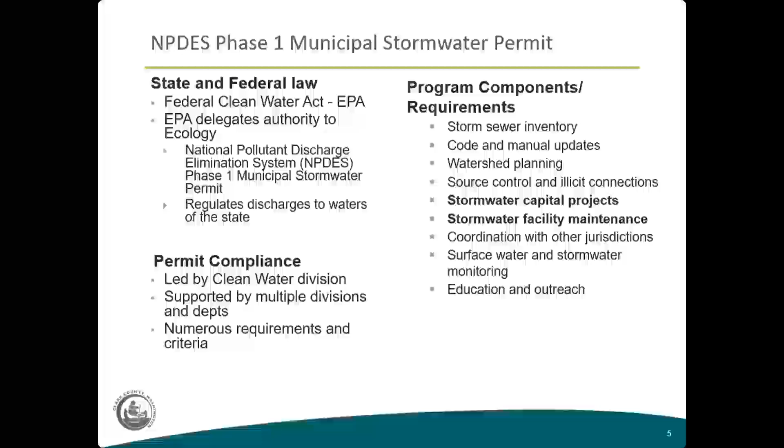So our overall policy at the county is to meet those Phase 1 permit requirements, but along the way, our goals are to protect and enhance our streams and wetlands, minimize stormwater impacts to receiving waters, streams, lakes, wetlands, and also to maximize public benefits from our county-owned lands.

So within the regulatory requirements of the stormwater permit, specifically for capital programming, we have to have a program to manage stormwater for existing developments. So we're trying to prevent or reduce impacts to waters of the state by building projects to take care of stormwater. We're also required to do some stormwater management planning, to do a lot of maintenance and operations of our stormwater assets, and also work on underground injection controls, which are dry wells that put water back into the ground after it's been cleaned.

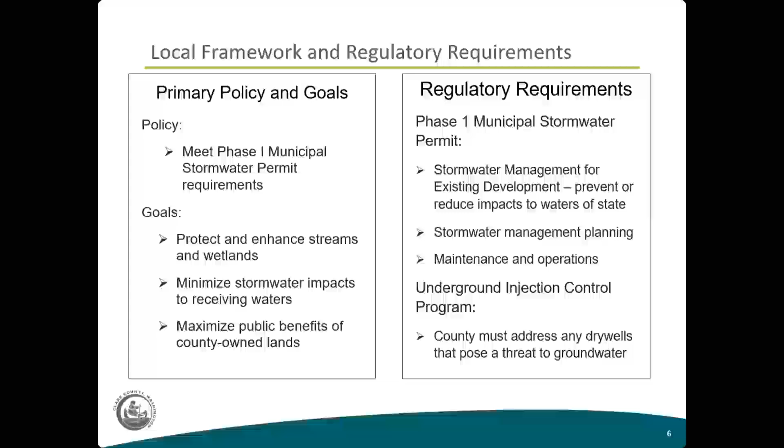So a real quick summary of what we've done in 2024. We had 7 projects this year that were in our construction phase. The largest was a water quality project on 78th Street over by the county's Heritage Farm property between Northeast 13th and 16th Avenues. The picture on the right is a crew member installing a treatment vault at that location.

And then we also had a reforestation project that's currently underway. As we speak almost, they're in the middle of planting an area of Salmon Creek Greenway near where Cougar Creek enters Salmon Creek. And then we had 5 stormwater facility repair projects, which are an important component of our program, taking care of the infrastructure that we already have. We had 9 projects in design this year.

We're always looking ahead, and you have to get ahead of these projects because it takes several years to take a project from the start to finish. So we're always designing the next projects down the line. And kind of similarly, we're also looking for where the next projects are going to be.

So we're looking at our reforestation planning work. Where's our next planting project going to be? And we also continued doing some sub-basin planning where we look for retrofits to the stormwater system in specific areas. This year we did Lalonde Creek, which is a small tributary to Salmon Creek. Our budget this year was about $1.6 million, which is a typical annual budget.

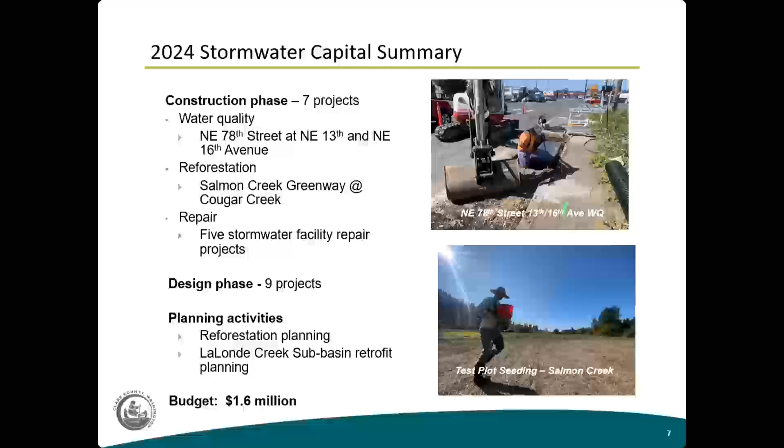Okay, so looking ahead a little bit to the 2025 to 30 project matrix and our priorities for this time period. As I mentioned, repair projects are typically our highest priority. When our existing infrastructure needs some work to get it back into shape, we want to do those things first and foremost to make sure that our systems are working well. It makes more sense to do that than to go out and build a bunch of new stuff if we're not taking care of what we already have. So we do a lot of that.

And then we also do a lot of water quality treatment in areas that have little to no stormwater treatment currently. And one of those areas in the county is the lower Salmon Creek area. So we've been focusing for the last 5 or 6 years now on the lower Salmon Creek tributaries. That would be things like Cougar Creek and Suds Creek and Lalonde, like I just mentioned.

Another priority is reforestation of our county lands. We had a goal to reforest or revegetate with native species 30 acres of county property in 6 years. We just met that goal very recently. And so we're going into our next 6-year period, and we hope to do another 30 acres or so going forward.

And then lastly, we always prioritize property acquisition for stormwater benefit. And to do that, we typically partner with the Legacy Lands and Conservation Futures programs at the county to purchase properties, or at least contribute to purchasing properties off of their acquisition list.

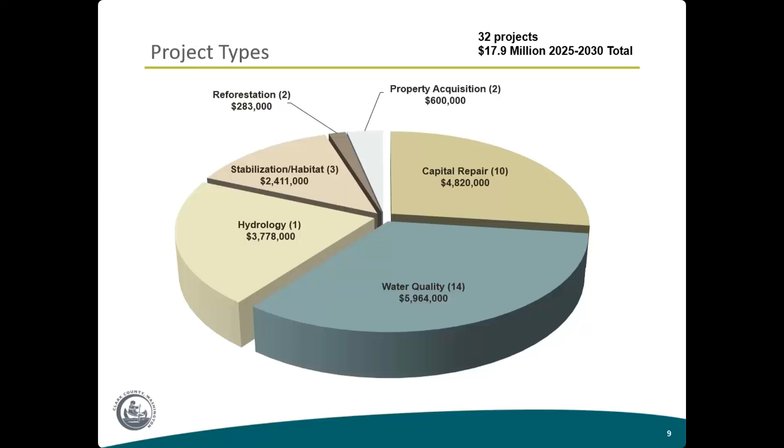So how do we fund these projects? For 25 to 30, to fund that $18 million capital budget, we'll get about $5.5 million from our Clean Water Fund, which is the fund that we use for most of the Clean Water Division work. We have some real estate excise tax 2, or REET 2, monies that we're going to be utilizing this 6-year period, $7.5 million. We always like to try to get grants when we can, so we're assuming about $1.5 million of grant revenue. And then we also have one nice big loan for $3.4 million for one of our projects, again, that Heritage Farm project. The nice thing about the loan is it's a 20-year repayment at only 0.4% interest.

So quick look ahead for 2025. We'll have 5 projects in construction. Our big project is the Heritage Farm wetland restoration that I mentioned.

And then we have 3 kind of major water quality projects along Highway 99 and 99th Street corridors. These are places where we do long linear projects to try to treat high traffic roadways that have very, very little treatment, and the water just goes directly into, in this case, places like Cougar Creek and Suds Creek, which are lower Salmon Creek tributaries. And I'll talk a little bit more about that when we look at some examples.

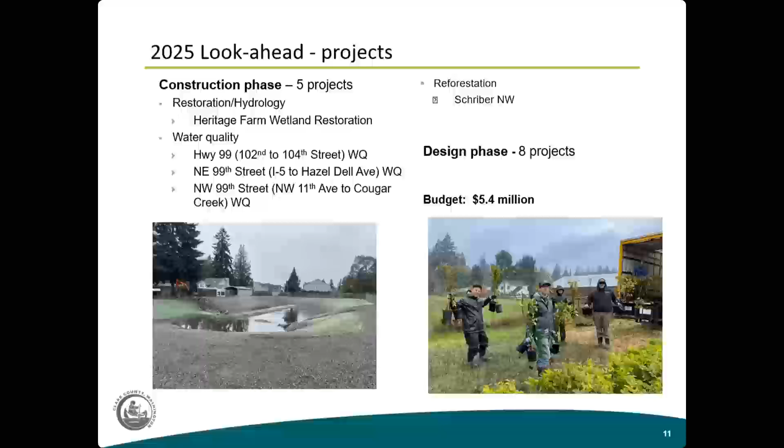So quick look ahead on the planning aspects for 2025. This next year, we'll be looking at evaluating impacts from our brand new municipal stormwater permit. They are reissued every 5 years, and our new permit came out in August of 2024. So we've got some new requirements, as I mentioned.

We'll have to score points based on a metric that the state gives us to make sure that we do enough stormwater management and stormwater capital work. So we're going to be working on determining how many points we're going to get from the plan that we have and see if we need to change anything going forward.

We'll continue doing some sub-basin planning similar to Lalonde Creek. We're really trying to take a look at some of the places now that drain into lakes such as Lacamas Lake or Vancouver Lake to try to get a handle on where we can do the most good with our capital program. We'll continue looking for more reforestation planting opportunities, and then we're going to move into some more intensive asset management and long-term capital planning, hopefully in 2025 or 2026.

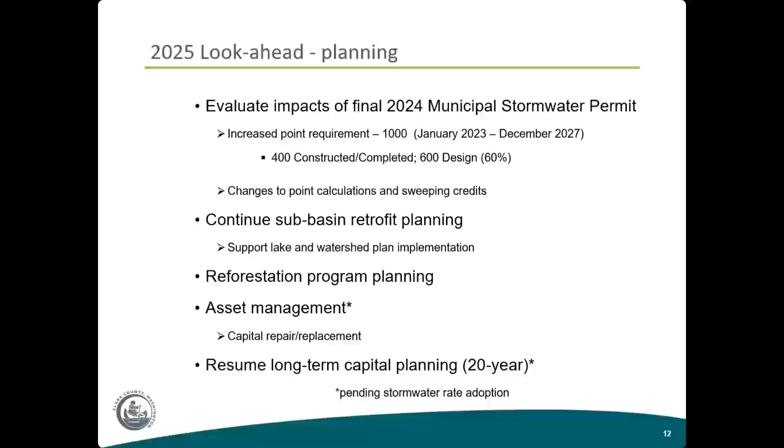Okay, so that's kind of an overview of the program and where we're at with the 2025 to 30 plan. So we wanted to share just a couple of quick examples of the types of projects that we do. And there's really 3 categories that I'll share with you really quickly. And the first example will be the Heritage Farm wetland restoration. And this is a big wetland restoration project. So one category of projects is sort of a restoration and enhancement type of project. And then I'll go over a couple of other types as well.

So the Heritage Farm, this project was part of the Heritage Farm Master Plan in 2020, which calls for enhancing the Cougar Creek watershed and wetland areas. This is at the headwaters of Cougar Creek. And we're going to kind of take what you see there. It's essentially where that light colored line going laterally across the picture is a ditch where old historical wetlands were drained to make room for farming and putting the buildings. We're going to take that and turn it back into a wetland to the extent that we can.

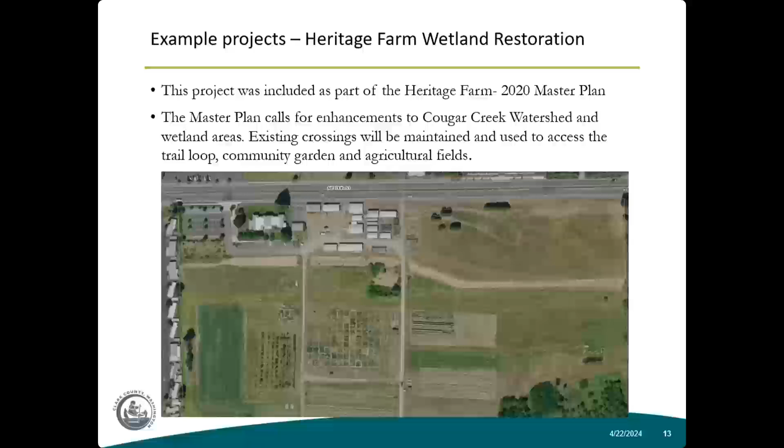So the overview of that project, we're going to convert that ditch back to a series of 8 wetland cells, and that will restore the natural headwater wetland functions of that area. It's about a 6-acre project, and we'll plant about 3,000 native trees and shrubs there when we're done. So the benefits to that type of a project, we're going to increase the groundwater recharge in that area, which will enhance summer stream flow downstream in Cougar Creek and also in Salmon Creek, which is a salmon-bearing stream. So it's good to have that summer stream flow to keep the fish cool.

We should also see some improved water clarity because we'll be reducing sediment going into the stream, as well as those summer water temperatures in both Cougar Creek and Salmon Creek downstream. So all of the improvements that we're making up top at the headwaters should translate to some improvements all the way down the system and into Salmon Creek.

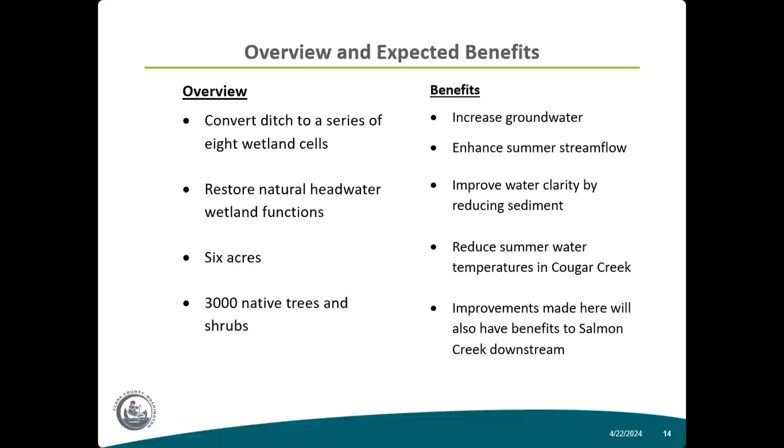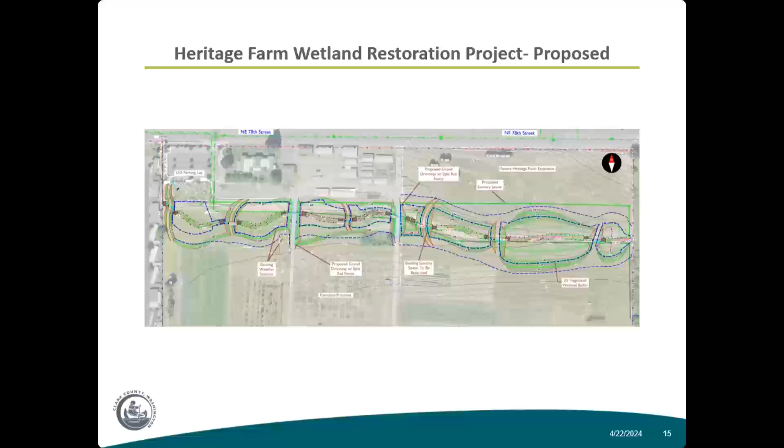So this is a little small, but you can see the overview. It's overlaid on that picture we saw before of the existing ditch, but you can see where we're going to widen it out into these cells that are wetland cells to store water and hopefully create a much better habitat and a more functional headwater wetland.

As far as planting, about 3,000 plants will go in the ground out there. All native species, things like flowering currant, dogwood, salmonberry, Douglas spirea, all natives to the Northwest. They're great habitat for both pollinators and birds, and various other creatures.

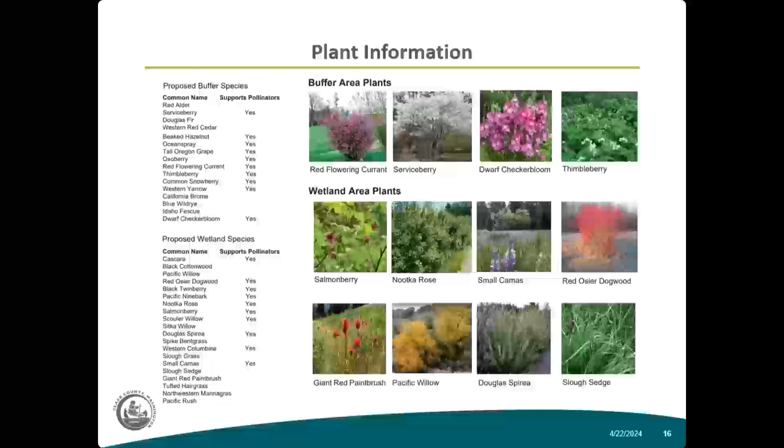And so we're excited to be able to put back a functioning area there. As far as funding, this project got a grant of $500,000 from the Centennial Clean Water Program at Ecology in 2020. We also got a loan offer from the Department of Ecology for almost $3.5 million that we'll use for the construction phase, and that's a very, very low interest loan, so it's a good deal all around. But the overall project is one of the largest we've ever built, a little over $4 million.

Okay, second example is more of our bread and butter type of project. This one is called Highway 99, 78th to 86th Street water quality. You can see the purple segment there is the project area going north from 78th Street just to the east of I-5. That's Cougar Creek coursing through there, that waterway, so we're focusing on that drainage here.

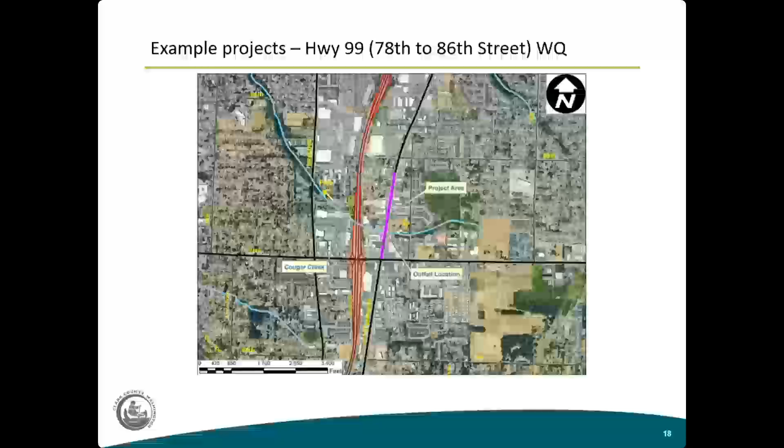This particular project, all of Highway 99 in this area is currently untreated for stormwater. It discharges all of its water directly to Cougar Creek with no treatment. It's about 7.5 acres that we're going to treat, with very high daily traffic load, one of the more heavily traveled roads in the county. So we're going to install treatment vaults and catch basins at 10 locations that will treat sediment and phosphorus.

So the benefits of this: we're going to remove phosphorus, which is a nutrient of concern for downstream water bodies. We're going to improve water clarity by reducing the sediment load, and the improvements we make here will reduce pollution downstream. We're dealing with harmful algal blooms, nutrient enrichment, and sedimentation in Salmon Creek, Lake River, and Vancouver Lake downstream. So this is one way we can utilize our capital planning program to start reducing some of those issues we see in downstream water bodies.

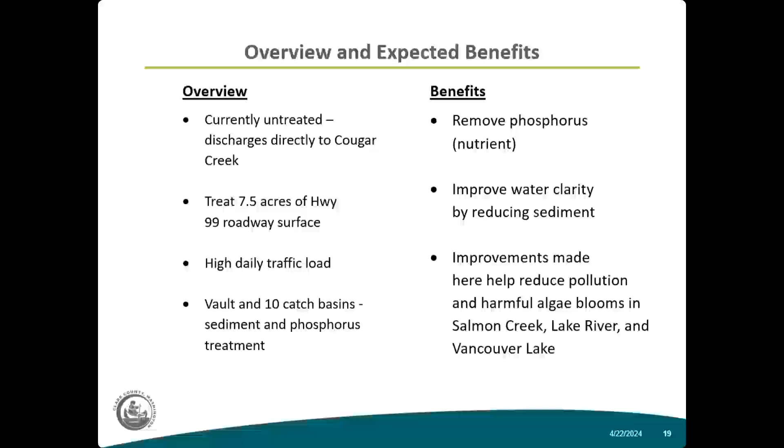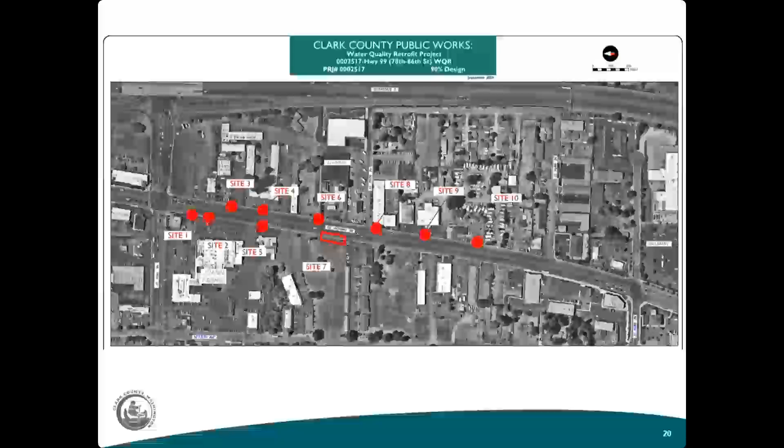If you look at it from overhead, you can see on the left-hand side of the screen that's 78th Street, and we're going north to the right. There are the 10 locations where we'll have catch basins, and the rectangle there is a larger vault. What's in those vaults at those locations are stormwater treatment cartridges.

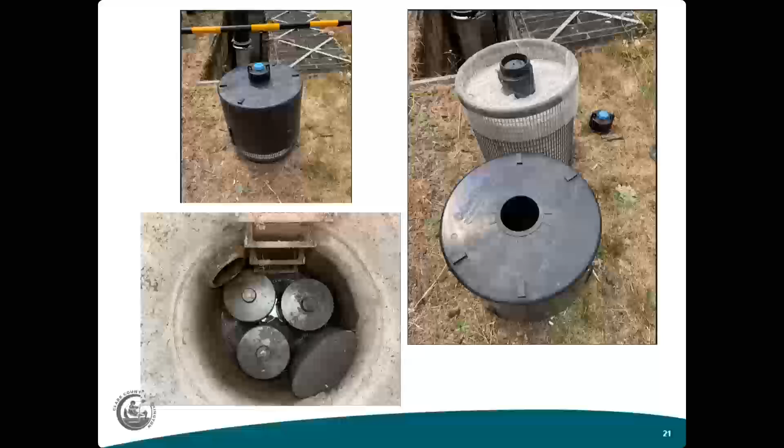We've been doing a lot of these types of projects along heavy traffic roadways because there's very little room to build additional stormwater infrastructure off to the side or on a parcel. So what you do is go underground and install these vaults and catch basins that we can put in place right where they were before.

But what's inside those vaults—if you look in the upper left, that's a photo of one of the cartridges that goes into those cells and treats the water. It looks a little bit like an oil filter for your car and works similarly. If you look at the right-hand photo, if you take that plastic shell off, it's filled with a granular media that's in there to filter water as it goes through.

So you put the whole thing together, put several of them into an underground vault or structure like on the left bottom, and then the water comes in. When it gets in there deep enough, it will turn on a siphon suction in those cartridges, and it will filter the water through that media and send the clean water on out to the stream or back into the drainage system. We're really excited about using those.

There are some new media types out now, the stuff that goes inside them, that will remove phosphorus from the water. And that's a real boon to places like this in Lower Salmon Creek, where we're really trying to reduce phosphorus for some of those downstream issues.

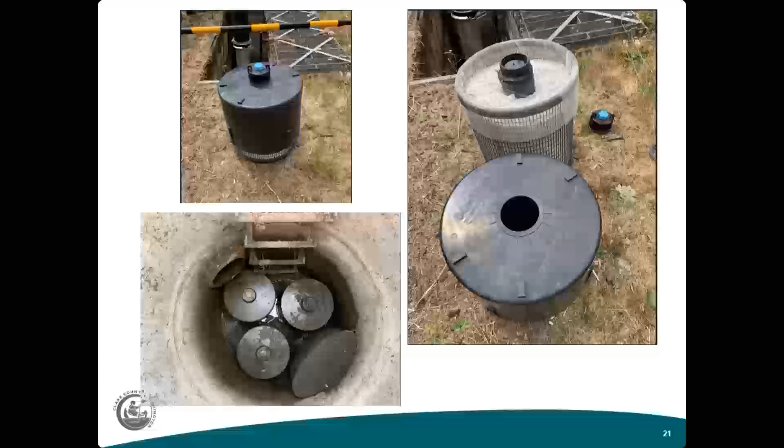Okay, this one's about a $715,000 project, so still a fairly large project. We did apply for some grant funding for about $590,000 of that through Department of Ecology's Water Quality Combined Funding Program. We won't learn about that one until June of 2025, whether that grant comes through or not.

So, we have our enhancement projects, wetland projects, and our treatment projects for water quality. And then a third type of project that you see quite a bit in our capital plans are reforestation projects.

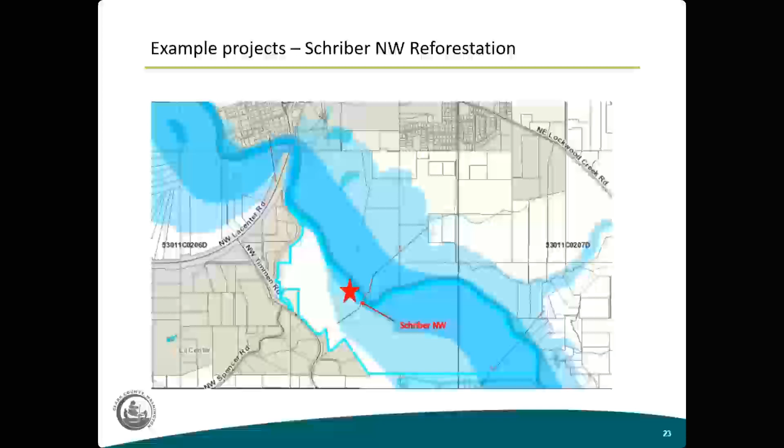Here again, we have county property in the East Fork Lewis River Greenway. We're going to revegetate about 6 acres, kind of where that blue arrow was, and we've already finished with 13 additional acres in that general vicinity. So we're getting to have a pretty large area that's been fully reforested on that south bank, which is pretty exciting. The benefits of this kind of work: we're looking for a diverse riparian native plant community.

We're looking for invasive species control. Oftentimes these areas are pretty much dominated by things like reed canary grass and blackberry. So when we go in and do a planting project, we get rid of all the invasives and put in natives to try to take over the area. It will provide much better habitat and water quality improvements because it's stabilizing the soil and banks, reducing erosion during high water events. So we get a really good bang for the buck with these kind of projects.

We're trying to get about 30 acres forested every 6 years, and they're quite cost effective too. This 6-acre project will only cost about $130,000. It's always good to see, because some projects get pretty expensive when they're hard infrastructure—they get to be a little bit more pricey than the ones where we can just plant some trees. So it's a nice balance in the program.

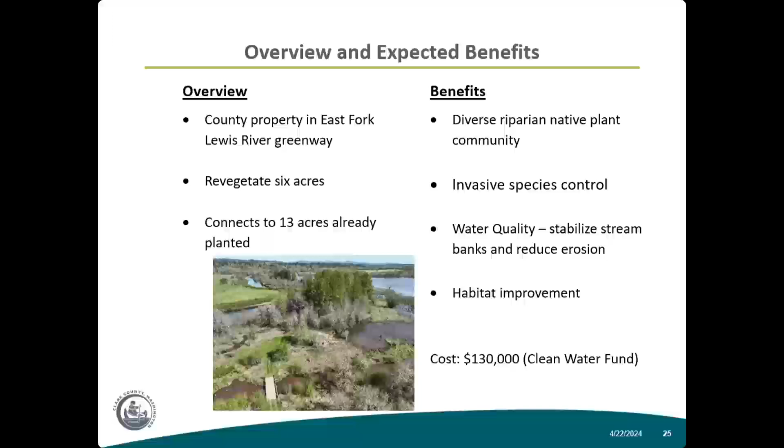Okay, so that is a really quick spin through of some of what we do for our capital programming. We want to try to go to questions right now. Let's see if there's any questions. All right, so I'm going to turn over the microphone to Eric Lambert here, and Eric's going to talk a little bit about our stormwater management program overview, and then we can come back around and take questions on either part.

Thank you, Jeff. My name is Eric Lambert. I'm the Clean Water Outreach Specialist for Clark County Public Works, and I'm going to talk about our stormwater management plan. We call this, and I'll be referring to it for the rest of the presentation, as the SWMP. This is a document that we produce each year, and it's required under our permit, our NPDES permit that Jeff referred to earlier. It basically describes how Clark County manages our stormwater through that permit, and also details our efforts to protect water resources. It's divided into sections that align with our NPDES permit and its requirements. Another key part is that feedback is accepted at any time on any part. It's about 120 pages, so I hope to describe some different sections of it here, because we don't expect anyone to read the whole thing—just to find the part you're most interested in and comment and provide feedback however you wish.

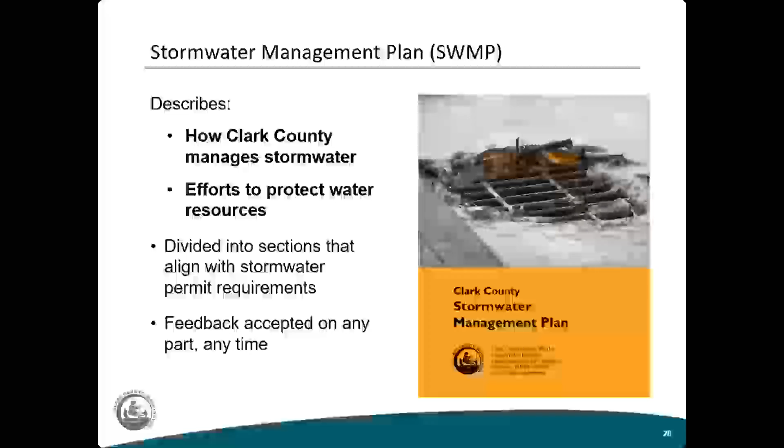So again, this is all pertaining to our NPDES compliance requirements. The first part of the SWMP is our legal authority and regulations—this is our codes and permits, and basically what we need in place as a county to meet these requirements.

The second part is inventory and mapping. This is a permit requirement, and it's also a really important part of meeting the other requirements in our NPDES permit, whether it be pollution prevention, operations and maintenance, or our monitoring program. So having our inventory of stormwater infrastructure mapped out in a GIS system—that's what this section describes.

And then operations and maintenance, this is our own stormwater infrastructure, and it also covers a little bit about how we manage runoff coming off of our roads and some of our other properties.

The other section here is detecting and reducing pollutants. This refers to what we call source control or pollution prevention assistance, and IDDE, that's illicit discharge detection and elimination. So this is visiting businesses, working with businesses to prevent pollution, and also identifying illicit connections, and if there is one, making sure that it gets fixed.